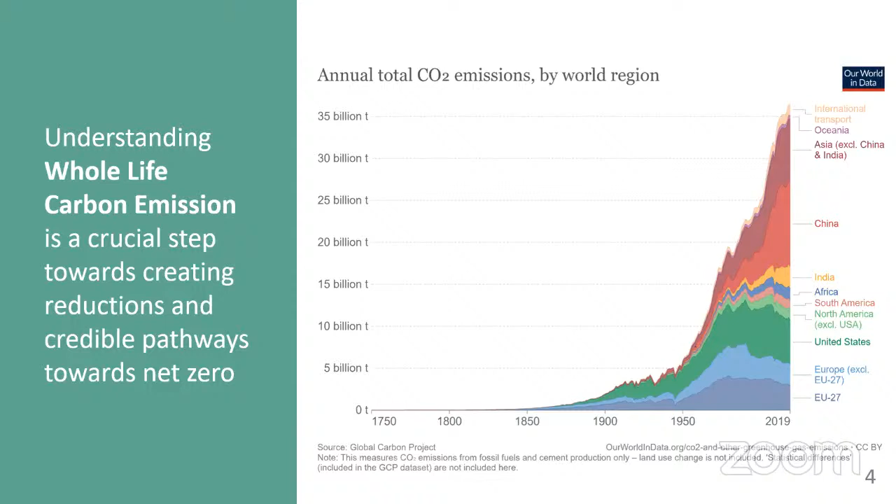This slide shows some important statistics illustrating the annual production-based emissions of CO2 measured in tons, noting that approximately 38% of energy-related greenhouse gas emissions are attributed to the building industry. It is estimated that approximately 255 billion square meters of buildings currently exist in the world, with roughly 5.5 billion square meters added every year. This really means a city the size of Paris is constructed every single week. Thus, understanding the whole life carbon emission is important in creating reductions and credible pathways towards net zero.

Before I start with the way forward in this presentation, I'd like to highlight certain definitions that are really important to relate to. The carbon dioxide equivalent emission is a parameter which approximates the time-integrated warming effect of a unit mass of a given greenhouse gas relative to CO2.

The CO2 that comes from operational carbon and embodied carbon is the same carbon, and we have to treat both, whether embodied or operational. What is embodied carbon? Embodied carbon is the emissions of an asset, representative of the total greenhouse gas emissions and removals associated with both materials and construction processes throughout the whole life cycle of an asset.

Now, operational carbon, which we are familiar with, especially engineers currently working in sustainability, refers to the greenhouse gas emissions associated with energy consumed and water supply and wastewater treatment of an asset over its life cycle. Now, the word we want to highlight in this presentation is the whole life cycle assessment, which is really the method to quantify both embodied or operational emissions of an asset during the life cycle. Why am I highlighting this word?

Because really, if we cannot use the whole life cycle assessment, we cannot achieve a zero building. Working within a whole life cycle framework allows us to have accurate judgments, to balance the savings of both operational and embodied. So what are the benchmarks?

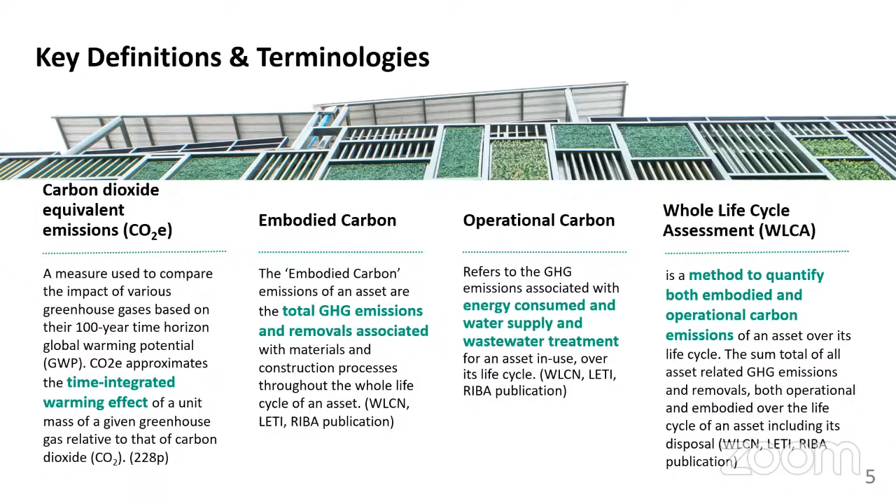What are the codes and standards that we relate to? What we are using is the EN 15978 standard, which provides the calculation rules for the assessment of environmental performance of new and existing buildings, from 2011, by the way. So let us see how the whole life cycle assessment looks like.

You can see here that we have stages from A to D, and these stages are divided into modules. This is basically the whole life cycle of the building. Stage A represents the product and construction, with modules from A1 to A3 and modules from A4 to A5.

A1 to A3 represent the product stage and manufacturer stage, which accounts for carbon emissions associated with cradle-to-gate processes. Modules A4 to A5 represent the construction stage processes, accounting for carbon emissions associated with transportation of material to the construction site—for example, material waste, construction plant, and machineries.

Moving to stage B, here the building is in function or in use, and it is divided into 5 modules, B1 to B5, which relate to embodied carbon. Then we have B6 and B7, which relate to operational carbon—basically energy and water. Now, stage C is the end of life, associated with demolition and waste processing.

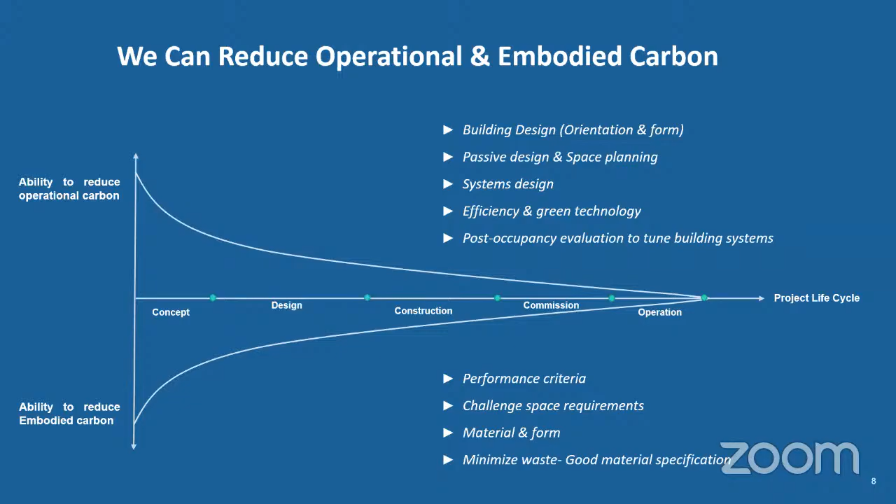Here we show the operational carbon and the embodied carbon. A design approach for reducing operational carbon typically includes a lean design, and in a lean design, we care to reduce energy consumption—this is essential to reduce carbon emissions.

Then we look to a clean design. A clean design is once the building form, orientation, and facade are optimized through energy modeling—we then develop a strategy to reduce the remaining energy and focus on minimizing energy and optimizing all the systems within it.

Then we move to the green design, which is the use of renewable resources—any type of renewable resource is considered green design. Now, if this renewable resource, on-site or off-site, is not enough, then we go to offsetting—offsetting the remaining carbon through a recognized offsetting framework.

Now, what about the embodied carbon? The embodied carbon thinking considers building nothing, which really optimizes opportunities for repurposing and reusing. Building less, meaning that if I can look more into the space utilization, that would really serve my embodied carbon decrease well. Building clever, through the use of smart materials to reduce embodied carbon, and minimizing waste through the use of prefabrication to minimize waste on the site as well.

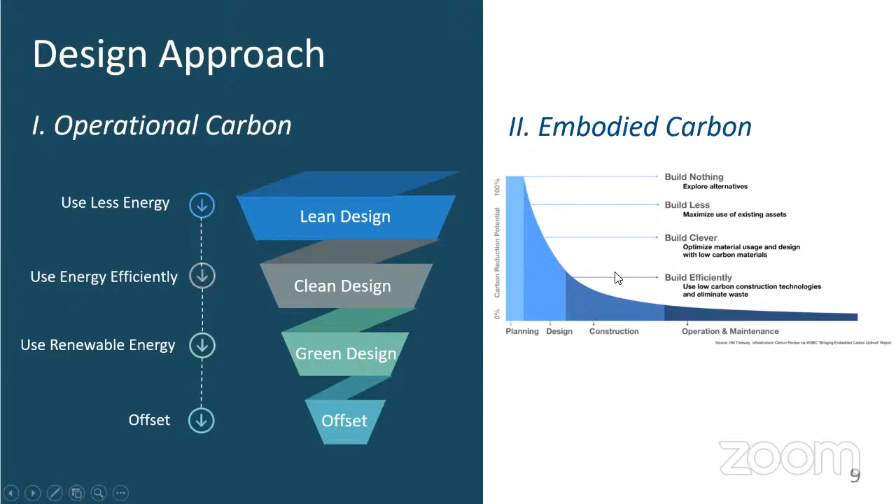So the presentation from here on will be divided between operational carbon and embodied carbon, starting with operational carbon. We will be addressing operational carbon emissions, and it is very essential to begin with strong passive design and to minimize the need for active systems.

So first, what we do is look at how we can really maximize energy efficiency. We need to start with reducing energy demand, which will limit eventually the quantity of on-site and off-site renewables needed to offset this energy consumption. So what are typical energy efficient strategies we look at? We look at high performance building envelope, energy efficiency of equipment and appliances, smart building controls, energy efficient lighting, and so on.

And how do we do it? It is really about balancing all design considerations to identify the most sustainable option. Modeling assists in visualizing the results. So for instance, here you can see that the window size has implications on both the daylight, the heating, and the cooling requirement, which in turn have a knock-on impact on the natural ventilation strategy.

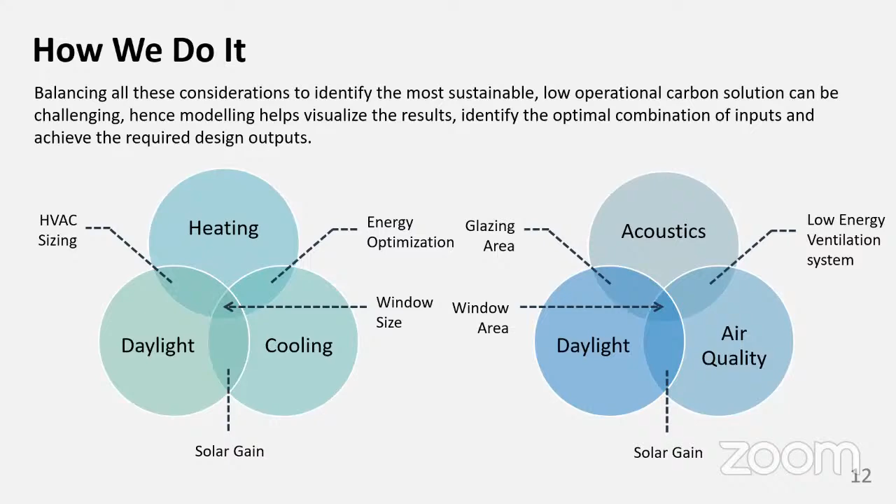Moreover, the window area has consequences on the daylight, acoustics, and air quality. So what we need to do is identify the optimal combination of inputs and achieve the required design outputs. And after that, we have to look into renewables.

Here we are considering the on-site renewables. It's now common to incorporate on-site renewables to produce emission-free energy, which offsets operational emissions. For example, solar photovoltaics is a typical option for creating energy on site. We see the ones that are roof integrated, ground mounted arrays on parking structures, ones now on building facades, and ones that are off-site, which we will look into in the next slide.

But then once we want to look at the PVs, we can look at various other parameters, which is simpler, which is more cost effective. We can look at less structural needs. So the roof integrated may cost less because I don't need structure for it to be built, like the ground mounted arrays and the parking structure and so on. At the end of the day, we care about having renewables to cater for all the energy demand that I'm needing in my buildings.

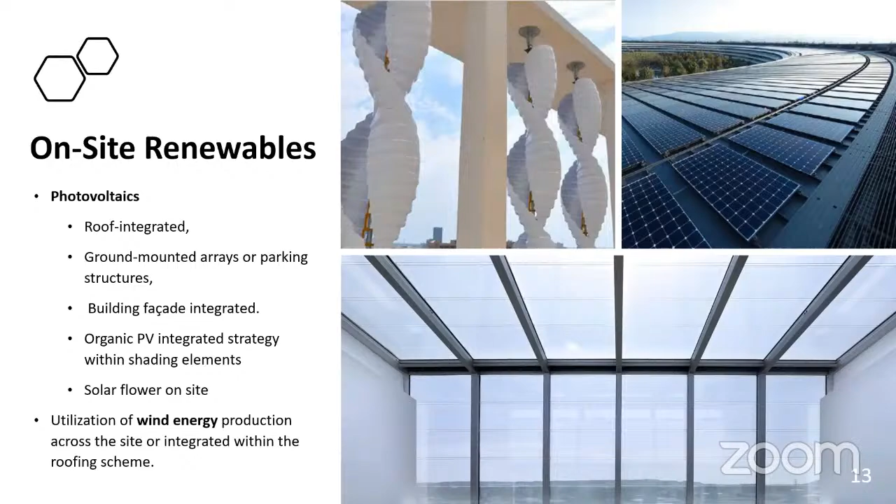So what about the off-site renewables? Meeting the energy needs of a project may not be possible, as we said, from the on-site renewables alone. So we might necessarily need off-site renewables to achieve the carbon neutral building operation status. The off-site renewables may vary in contractual agreements, including direct ownership and power purchase agreements that are common and available.

Next, we might want to consider managing our net zero operations, and that would be by ongoing monitoring and tracking of energy consumption and renewable production, which is necessary to understand the building carbon emission, and that is a really important step. We need to understand how much our emissions are, to be able to cater for them. So the utility bills, for example, or the building energy management system, can support the review of building system emissions.

The new construction projects can use predicted energy and carbon performance to compare against actual energy consumption and emissions, and that is known as the EUI, or energy use intensity. So we use it to cater for it, to model, to change, to optimize. For example, we can study if the refrigerants from the heat pumps and other refrigerants and fire suppression systems have leaked or evaporated. So what do we do?

We maintain the energy efficiency, we minimize the peak energy events, we manage our energy consumption and production, we adjust system control for efficient operations, we purchase additional renewables, and we track the embodied carbon related to product replacement.

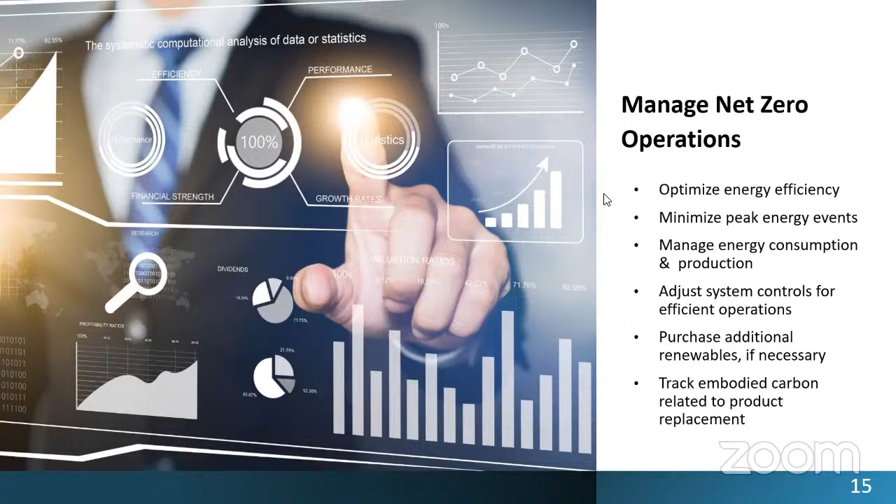Now, a word we have been hearing a lot lately is electrification and the minimization of on-site fossil fuel consumption. Our enemy is fossil fuels. Fossil fuels are the source of the carbon. Carbon neutral buildings minimize or eliminate on-site natural gas or other fossil fuels. So we need to get rid of all the fossil fuels that we are using. Building electrification combined with energy efficiency can reduce air pollution and assist with better grid management.

Now, as you can see here, the critical considerations I have displayed are the energy efficiency equipment, the high capacity electrical panels, electric chases and conduit runs, and electrical outlets near gas equipment.

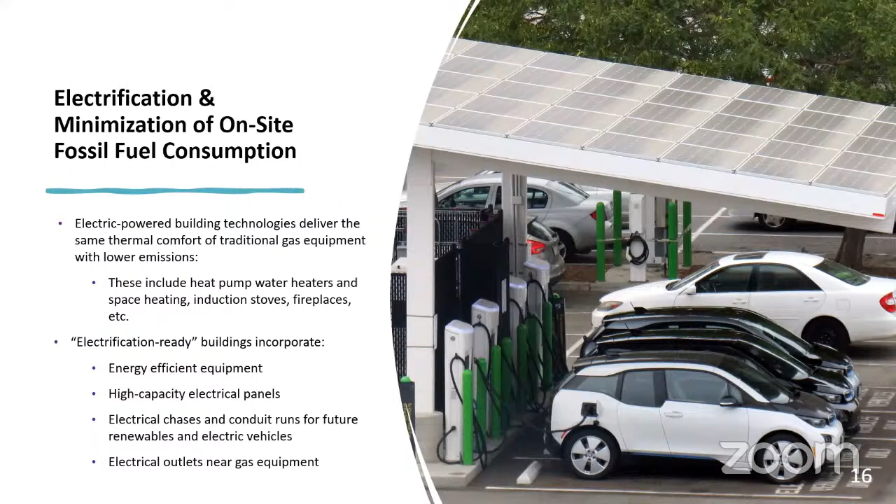Moving to building grid integration. This allows buildings and the electrical grid to coordinate energy supply and demand in an attempt to optimize energy consumption, reduce demand, offer more clean energy, and most importantly, provide a reliable electricity supply.

We've been hearing a lot about distributed energy resources, or DERs. These include solar photovoltaics, wind turbines, energy storage, electric vehicles, and combined heat and power plants. We've also heard about demand response, which allows grid operators to adjust building heating, cooling, and lighting to reduce power consumption and minimize community-wide service impacts.

So what should building operators do? They can simply adjust when grid energy is consumed and avoid peak energy rates. This is common in Lebanon. The balance of energy resources will improve how we use energy and support a modern grid capable of supplying more renewable energy.

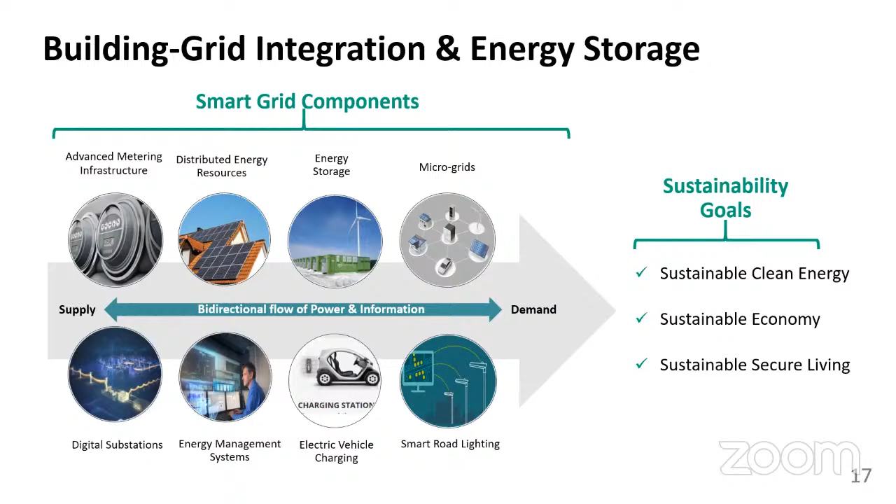Moreover, we've heard about grid-friendly building strategies that include efficient system peak shifting and flexible loads, smart controls, thermal mass storage, intelligent grid-integrated communication, smart systems, and so on.

Moving to low global warming potential refrigerants. Most refrigerants have high global warming potential. We've heard of refrigerants with no CFC content, but what about global warming potential? We're interested in this parameter because it can have 1,000 times more polluting effect than carbon dioxide alone.

Fire suppression systems and heat pumps are common sources of refrigerant, and they may also be sources of emissions from leakage or evaporation. So what do we need to consider? We need to compare equipment efficiencies, look at various refrigerants, minimize requiring refrigerants, and consider equipment with medium or low temperature refrigerants.

So how do we calculate carbon neutral operations? We need to look at four steps: determine the annual energy consumption and greenhouse gas emissions; deduct the energy production emissions avoided through efficient design; calculate the annual greenhouse gas emissions per location; and finally, secure offsite renewables to cover the remaining emissions.

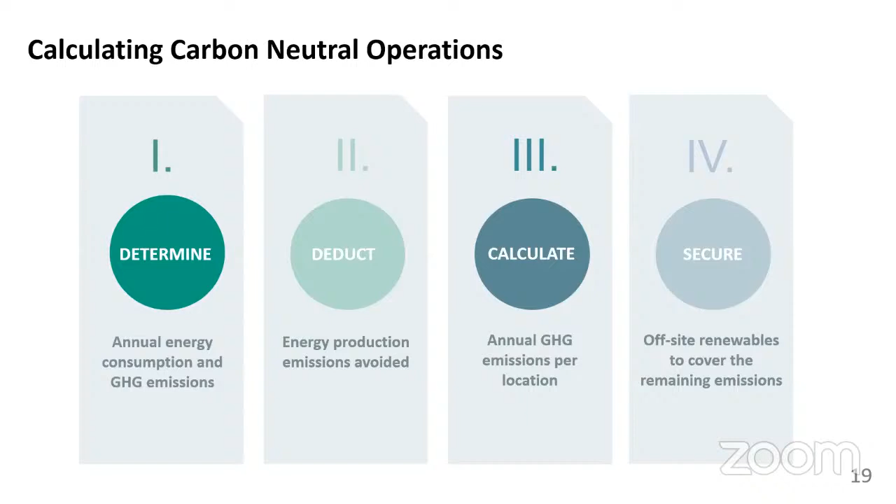Now we're done with operational carbon, we'll move to embodied carbon. Embodied carbon can be minimized by thinking carefully about the spaces that will be needed, and we should prioritize the reuse of existing structure. So reuse is the key word under the embodied carbon title.

Within engineering design, we typically propose a framework. When it comes to embodied carbon, we look at building nothing, which I've mentioned earlier in this presentation—being able to invest in opportunities for repurposing, building less or maximizing spatial utilization, and building cleverly using smart material.

If it's not possible to refurbish an existing building entirely, the reuse of material during construction to build a new development should also be explored, and finally, minimizing waste. This can be done through various methods, but the most common one lately is the use of prefabrication, even prefabrication on site, so that transportation emissions can be deducted.

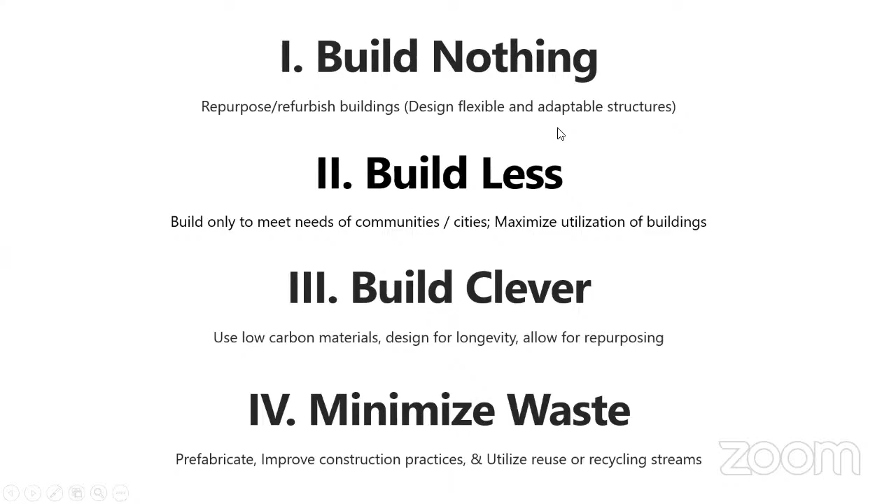So, low embodied carbon material: construction materials alone are responsible for about 11% of all global carbon emissions. Embodied carbon refers to the total impact of human-induced greenhouse gases emitted from material extraction. We're continuously extracting material, manufacturing it, and transporting it, and that is really not useful in the life of the building.

So material selection should be used to reduce global climate emissions. The critical considerations I've mentioned here are reducing the number of materials, reusing, prioritizing durable materials, looking at EPDs, and designing for deconstruction.

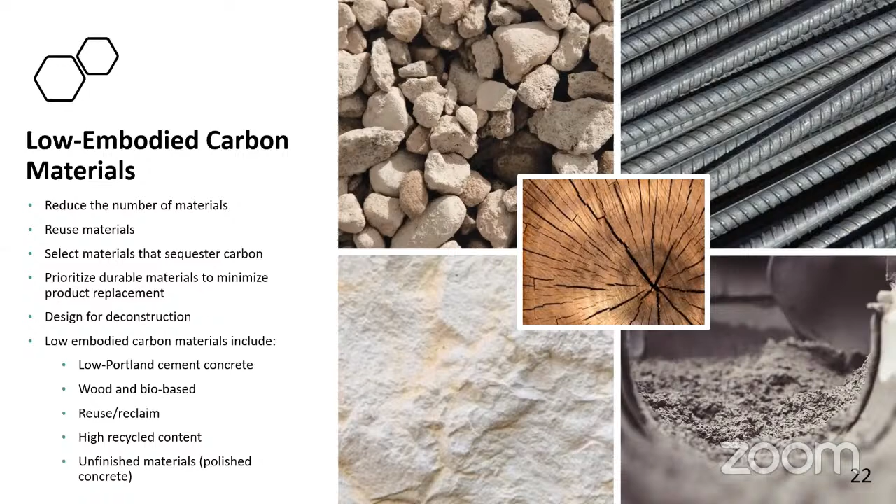Also, typical low carbon materials that we see now, with market maturity, are really eco-friendly, like low Portland cement concrete, wood, reused and reclaimed concrete, high recycled content concrete, concrete from fly ash, and so on. This is also important to highlight.

And we do have common strategies that are being implemented, but now the focus and the significant target comes to the embodied carbon. It can represent 40 to 70% of the whole life carbon in a new building. This information source is by LETI, embodied carbon primer.

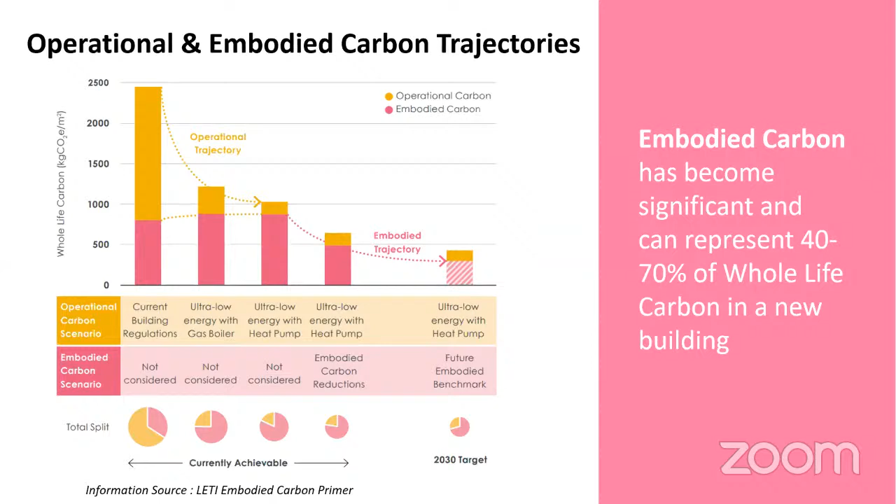Addressing climate change has traditionally focused on reducing carbon emissions from operational energy consumption. However, as buildings become more efficient, operational carbon is reduced, and this means that embodied carbon represents the higher portion, and we need to address it.

Thanks to LETI, this is one of the prettiest targets and reductions that has been developed, with a series set out that includes targets for reuse material.

Let us look at the targets that have been put, noting that the dark pink color represents the embodied carbon target. The yellow is the operational energy that follows the building regulations and the operational energy balance, which we are able to cater for and achieve.

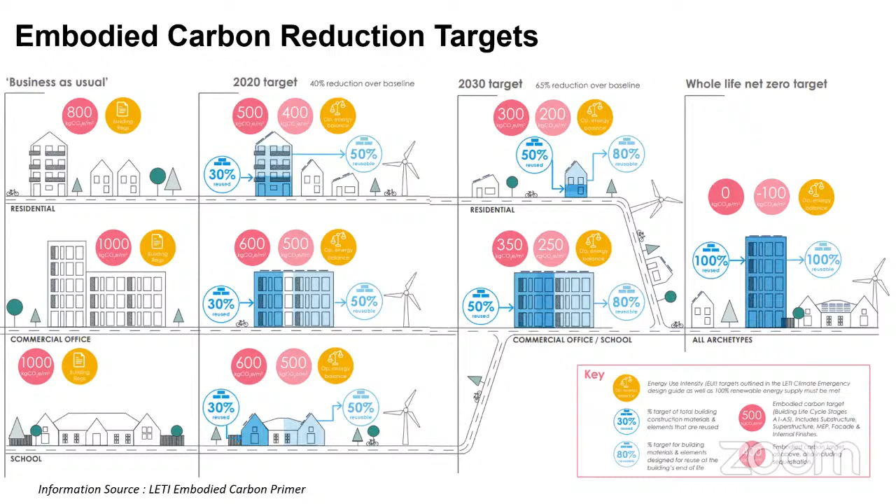And then implement a strategy that is doable, integrated within the project decisions with other disciplines, integrate the emission impact into all decisions and investments, and then track and report your progress, because it's all about tracking throughout the whole building life. This is through measuring and monitoring the project, disclosing the results, and adjusting any necessary values. So this is it for me.

I hope you enjoyed the presentation.

I can just add a few words if you like me to. Yes, if you please. We do have some questions, but please, go ahead.

The most important thing is really to commit to the whole life cycle assessment on all the projects. Lately, ASHRAE has been doing lots of work, and there are lots of collaborations among other research groups and people of codes and disciplines. So we will be seeing lots of guidelines, and ASHRAE will be providing a very efficient guideline as well. We need to take it in and implement it to all our projects very early in the design.

Most of the clients are now really aware of the targets. Their mission is really to address climate change as well in their projects. So by working together with the stakeholders, with all the disciplines, with the client, and the contractor definitely, and the manufacturer, we can really reach all the goals that I have mentioned throughout the presentation.

And really, the ability to define net zero is not as hard as it seems. There are typical green building certifications, such as LEED, as we all know, and there are other green building certifications, guidelines, and codes. So it's good to commit to them for a nice framework.

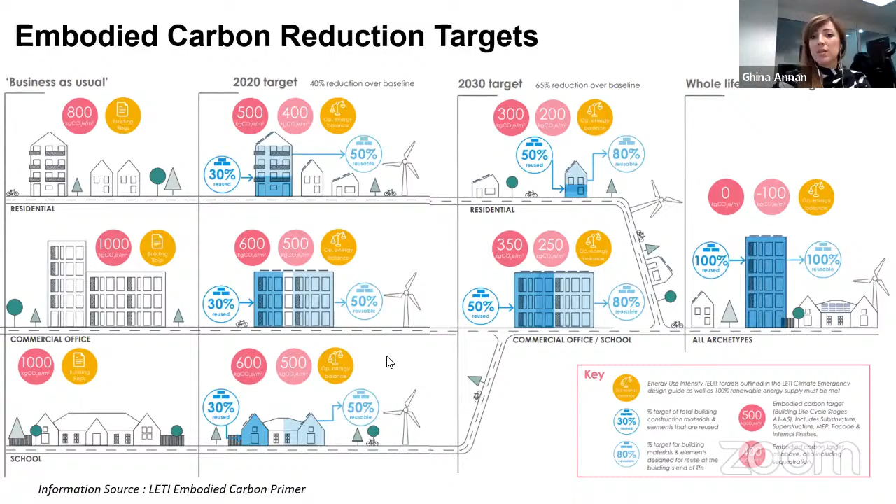I didn't go into it, maybe the next webinar would be adopting certain case studies. So the standard we're looking into is EN 15978, and it takes into consideration all those life stages, as I mentioned, along with the modules. They relate from the moment the building is built, from materials extracted, manufactured, and transported to site, then construction, then end of life and demolition of the project, inclusive of operation. We look into that, and we look at each and every structure of the building.

So I'll just give you an idea. You have a table with all the foundations, the walls, the facade, everything, and the material, and each material's contribution. Then you have the EPDs, where you get information about the material and how it's made. From there you can optimize and check other types of material that can be available, more sustainable, and better in terms of embodied carbon.

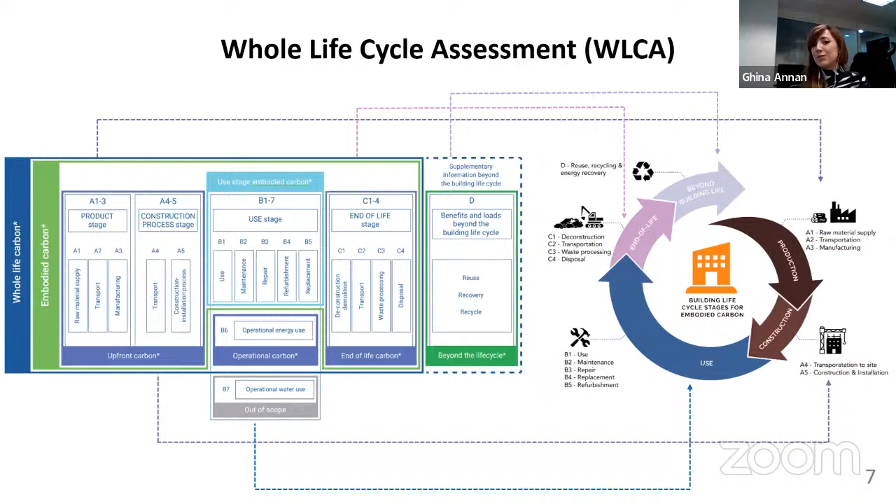Thank you. I think we all learned something very important today. Hopefully the next webinar will be even more important. Definitely, the next webinar should be on case studies, and that would be really interesting, in my opinion. I hope we'll have people on board as well.

Nancy is asking how she can contribute. I'm not aware of her background or type of work, but she can definitely contribute through awareness. We need more people to know about decarbonization, to be aware of the regulations, and to talk about decarbonization in line with what might happen.

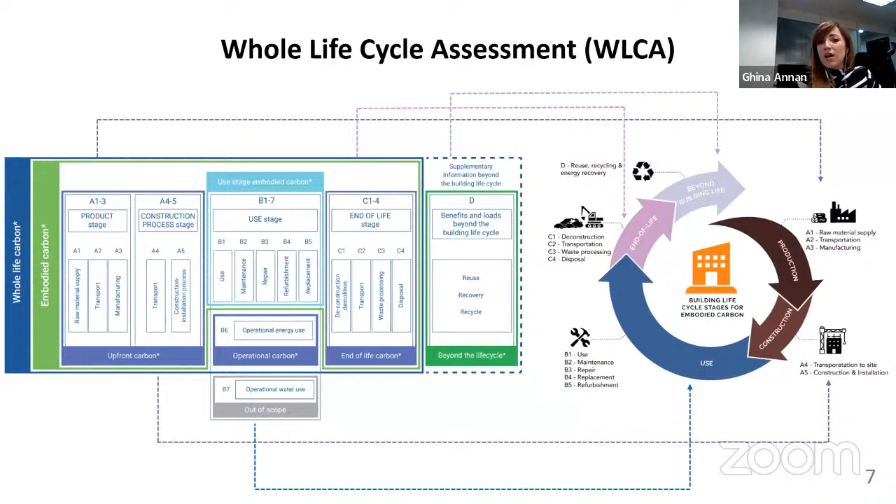At the beginning, I spoke of climate change and related it to the challenges, the solutions, and what we've been seeing lately: COP26, natural disasters, trends we've never seen before. In order for us to maintain life on Earth, we need to go this extra mile, and we need to do it quickly and in a way that is implementable.

Setting targets without being able to achieve them is not the right thing to do. But by spreading awareness, people would want to know more and design in a way that is really in line with implementable targets. Step by step, we can all reach this ultimate goal.

So in my opinion, no matter what your background is, I think awareness and spreading the word and telling people that it is not hard to do matters. You shouldn't be afraid of learning about it, implementing it, or checking what's happening lately.

The whole life carbon assessment is doable. We've been doing it, checking all the markets, implementing it in projects. The fact that it is implementable, and someone is telling you it can be implemented, should push you to know more, dig more, and spread the word.